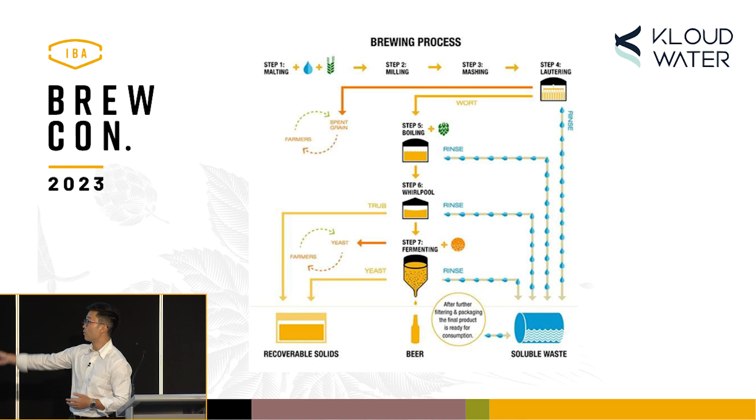What typically we think of as causing wastewater is the volume, and that volume is in your CIP, your rinsing, and also your washdowns. So that's where all your water is coming from, right? But actually, a lot of the concentration in your wastewater, which ends up driving up those numbers when we're looking at samples, comes out of what we typically consider the solid removal stage, because the fine tube at the end there, where you're trying to tap that away, if you tap that away, it's actually almost 100 times in some cases the concentration of the wastewater coming over here.

So that's what you want to be really careful of if you're not side streaming already. And if you're not side streaming, I would suggest that it's something you really want to consider, especially if you're a small craft brewery. As I was explaining before, if you do it earlier on, it's a system you can start to implement and have your team understand the value of, and thus when you scale, they know how to incorporate that as part of their process.

Now, when push comes to shove and the issue becomes a lot more intense, it can be even more of a challenge to ask your team, who's probably stretched thin already, to start incorporating processes to minimize the sort of liquid waste that's concentrated going down the drain. It's an easy and free thing that you can do, and it's probably one of the most effective things you can do when it comes to wastewater management.

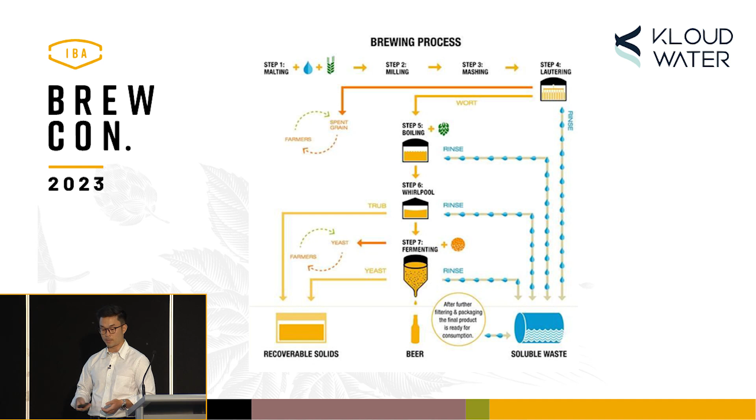So I've got a little video over here that shows wastewater being demonstrated. We've got canning here at Coastal Brewing Co. with David and Helen. If you have a canning machine, you're very familiar with this, but there's a bit of overflow that occurs during this process every time, and that's essentially pure beer going down the drain.

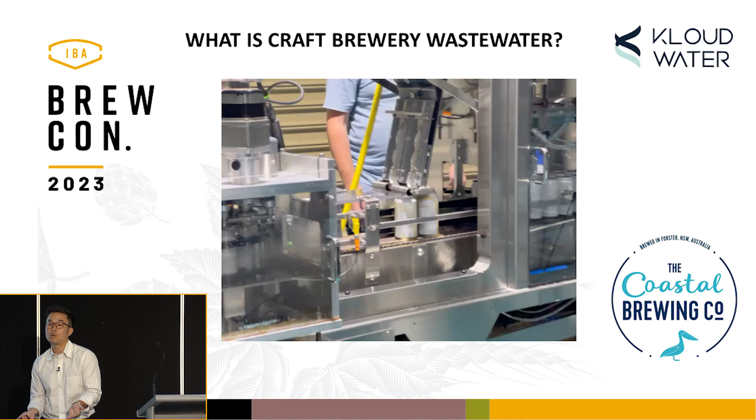Beer itself, obviously, is what we drink, it's liquid, it's liquid gold, so we don't think of it as very toxic in any shape or form. It's not compared to heavy metals, but one can just visualize what the effect could be if you were to take a gallon of beer and throw it down the river. It's quite intensive in terms of the effect.

And that's where your water eventually ends up going anyways, or it has to go through a centralized treatment system, which has to be sized well enough to treat that. So those are the mechanisms driving the concentration increases. A lot from that, but the sneaky one as well is trub.

So if we go a little deeper, these are the sample results that you typically might get, or this is what it might look like. I'm sure some of you are quite familiar with some of this chemical nomenclature. What's really important typically is flows, which if you don't have a flow meter, there are ways that you can forecast what that is, but typically you would have a flow meter.

In many cases, no, there is no flow meter, especially when a brewery is first conversing with me. But we can model that out. We can make estimations, say these are the ratios we can apply. This is the average, but if you want to be conservative you can choose this, and if you want to be optimistic you can choose that. These are the implications, and this is what you should be expecting. So we always inform, and it lets you have more options to choose how you want to approach the wastewater problem.

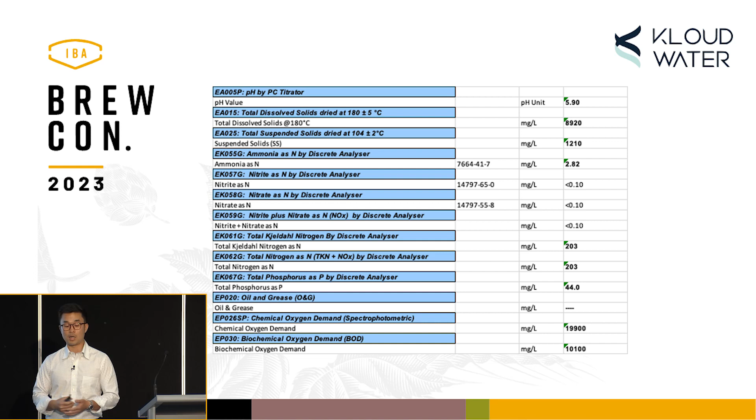And the last one is your organics in BOD, which is your sugars, and then nitrogen and phosphorus, which typically may come through your cleaning agents. But BOD is becoming more and more of an issue, especially right now—it's being felt by regional breweries. I hear quite a bit of rumbling in the metropolitan areas, depending on which metro areas in Australia you're looking at, but it will come, and it's always good to be aware of it and be informed, and make that decision quickly, readily, and informed when you come to that point.

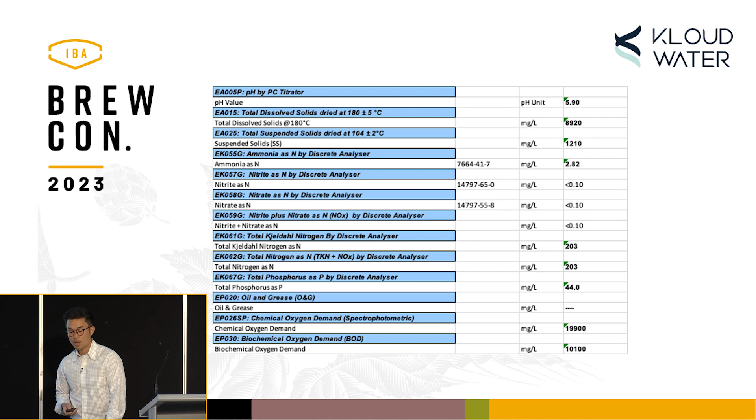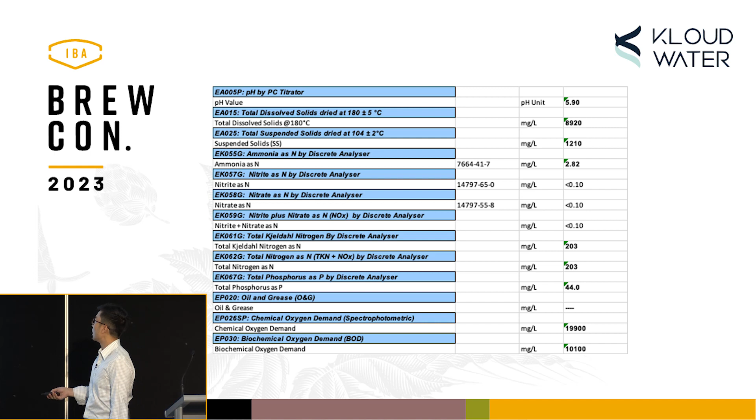I want to show how these numbers can differ quite a lot from this sample brewery to the next one I'll show you. I want to point out the BOD, which was 10,000 for this case, and also your pH, around 5.9. Flows we don't really have here. Even in the high scenario, this was actually modeled by a consultant to the brewery. It's always changing, every brewery has a different situation. They're much more optimistic because they had a consultant come in, and they were trying to ask the consultant to portray their wastewater in a particular light.

My advice in that situation is, that's fine. If you've looked at the numbers and you know your brewing process and think that's been demonstrated before, you can go for that, and we'll show you what our system, if you need treatment, will look like. But be informed that if your wastewater samples are a little higher than that, this is what you need as well. We'll always table those options for you, because we start the system design with modularity and scalability in mind. Those are the things you want to think about, even though you might want to demonstrate your wastewater coming in at a very low level.

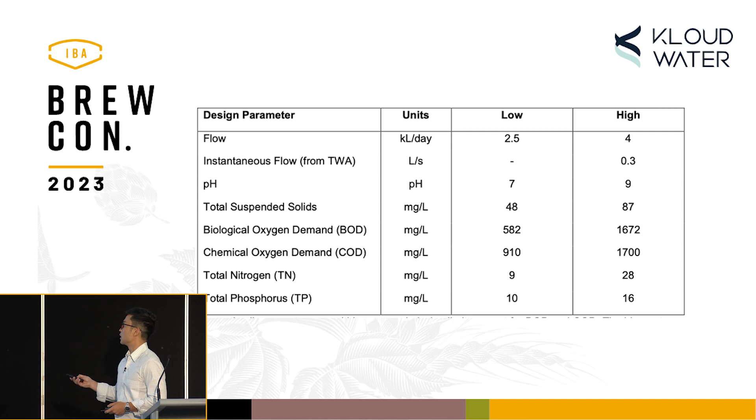Sometimes that might make a lot of sense, but in the long term, once you have the real world application and you're seeing results come back from a treatment system - say it goes in, you're thinking it's going in at 1600, it may not be. Then you're treating it and it's coming out at, say, 2000, and you're saying, what's going on here? We have to go back and do sampling if you haven't done that already.

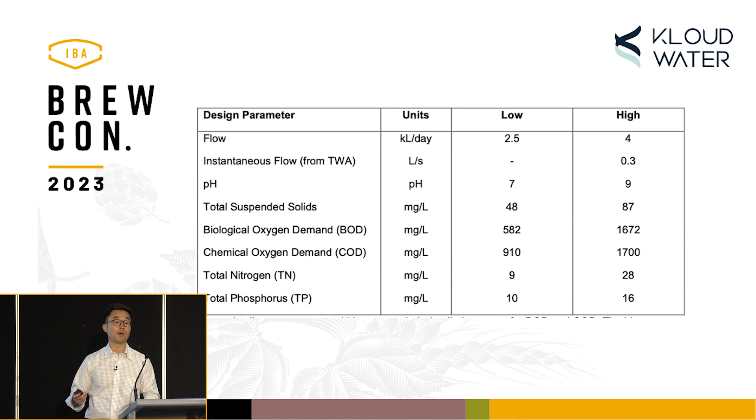So, the different ways we can explain this: do you want to choose 1600? Do you want to go for an industry average at 4000? Or do you want to do a sampling regime? That's probably what I'd advise - looking at your process, as a general template, sample Monday, Wednesday, and Friday, middle of the day, the easiest way. Combine it all, send it off to a lab. That's going to be much more accurate as an example of how I would address that, or how you could address that.

Okay, so priorities of a brewery - different forms of wastewater problems, that's what we're talking about now. Typically, the priorities of a brewery are as such - I just took this from some sort of strategy document. High quality beer production, product portfolio, winning new customers, et cetera. So this is what you guys are talking about, probably on a daily or regular basis. This is what it should be, right?

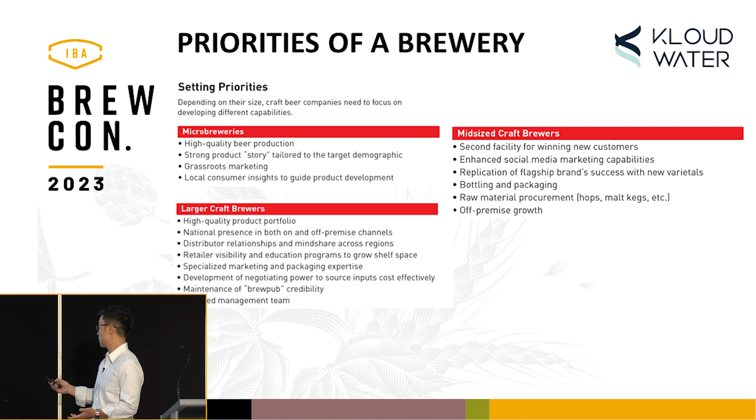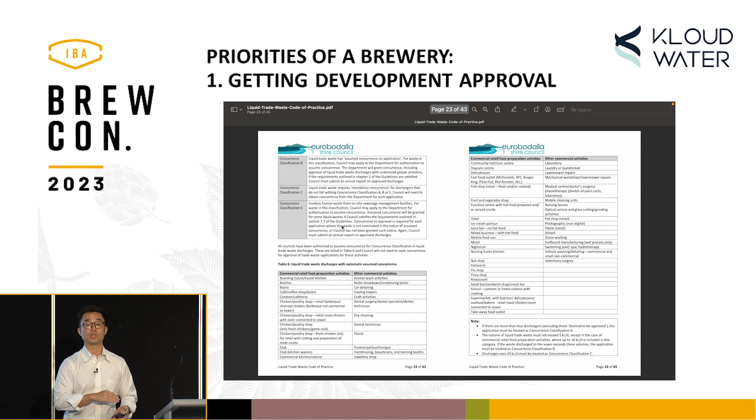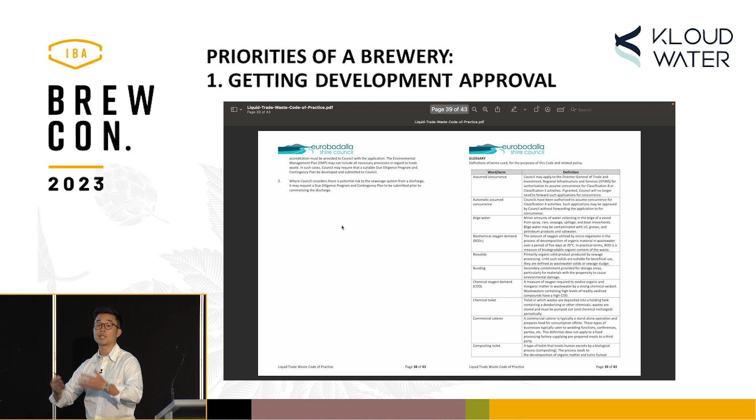But wastewater becomes your priority when it becomes a problem, right? And this is how it can be - there's a video that shows it scrolling through. You go all the way through the DA, through the process of securing the lease, you've bought the equipment, you're ready to put it in, and maybe your brewer's had experience brewing, maybe in Sydney, where all your wastewater just goes straight down the drain. You might think it's going to be the same process in your location, especially with a lot of destination breweries and brew pubs setting up in Australia. Then you find out that because the regional location is serviced by a smaller treatment plant, with a smaller demographic, you actually need to treat your wastewater and have a waste management plan.

As you saw that flick right through, this is going to be tabled onto you at the last second, and then you have to make sense of that, and form a plan to address your wastewater - which is not the most favorable thing to do right at the last second. Lease is secured, it's going to start soon, the equipment's already here. What do we have to do?

There's been, as I hear in the industry, many occasions where brewers are forced into a particular solution because it might seem like the right thing, or it might get them approval, but then they find out six months down the road that this thing's not going to last them for very long, or it's causing issues right now. A particular issue is getting a septic tank essentially placed into the concrete. I've heard it happen not too long ago, not too far from here, and now it has odor issues.

They had to rush the concrete cutting, and so the whole system, even though the tank is probably worth 15,000, ended up costing them $100,000 to actually execute on that project. And when you look at one of our modular systems, the very base level, it's a fraction of the cost. So it's a big... yeah, it's a little upsetting.

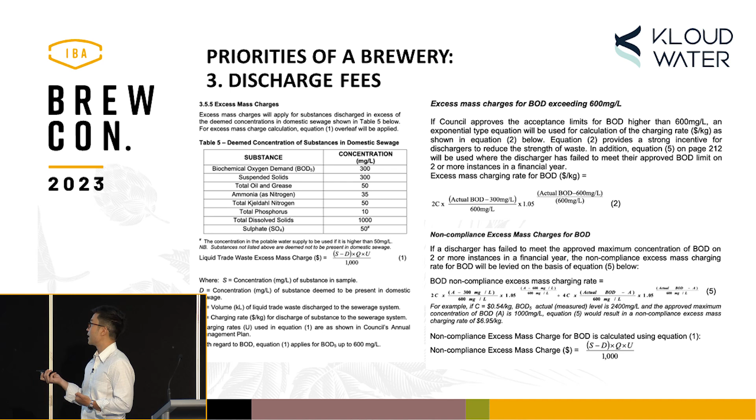But what you really want to know is that there's this equation - this is the most important equation out of all of it. I'm not going to try to explain what each piece means, but in its entirety, it's an exponential equation, meaning that if you discharge a couple of times and you're not meeting target, the fee exponentially increases, like so. They won't even call it an exponential equation, but it is - you can see, if you're into math, that's what it is. So that's what it means.

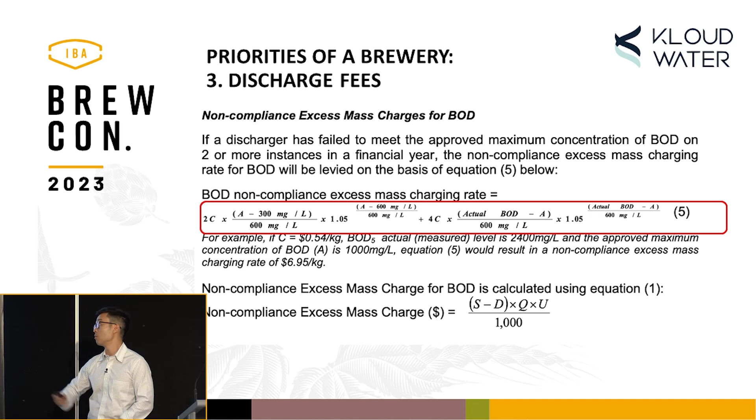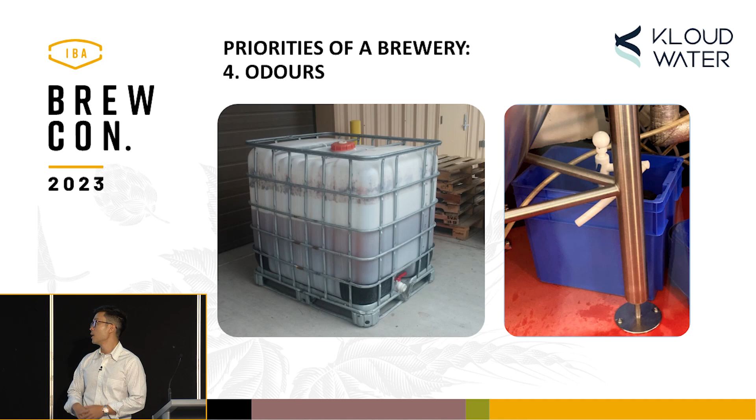And then lastly, odors is a pretty obvious one. If you have a primitive system that's just a tank in the ground, especially if there are blowers in it - a lot of the solutions proposed as an option for you are essentially a septic tank with blowers underneath. So you've got wastewater going septic because maybe you're not managing the flows well, so throughout the week you get a bulk of something like trub, for example. No one's told you not to put trub down the drain, and then you're blowing it, agitating all those fatty acids, which are very odorous. And if your brewery is anywhere close to your patrons, that's an issue in itself as well. So that one is very clearly obvious.

These guys typically do it - the consultancies, engineering firms, and specialists. They do wastewater treatment sites for big food and beverage facilities, the ones you see in your supermarket, plus sewage treatment plants, mines, and whatnot. Then there are the septic tank suppliers, who'll do it for off-the-grid homes. They'll look at your wastewater and say, hey, that's brewery wastewater, potentially that can go down our system. Yeah, it's happened before. So that's what the market was before.

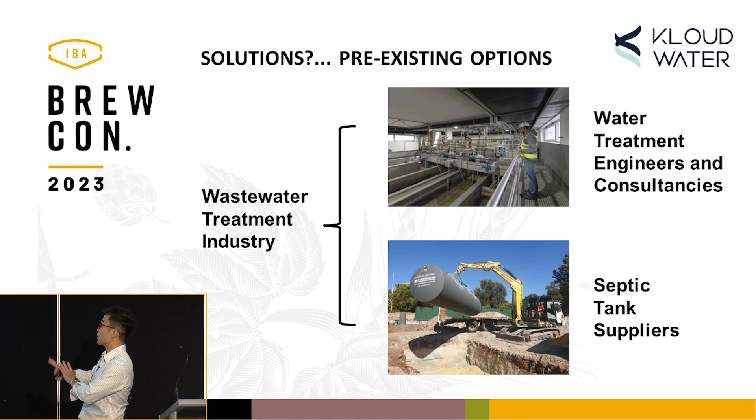So just a bit more context on how the actual structures of the business work. The size of the projects are much larger for these engineering companies, which requires a different design philosophy. If you're trying to design and detail a solution for a much larger facility and scale that down to the needs of a craft brewery, there's a lot of overheads and considerations suited for a larger facility that get incorporated into yours, because it's unlikely they'll adapt to your needs if they're running off a certain capital project.

Their supporting team as well - if you think about it, they've got typically fleets of servicing teams. Having that means they have to justify those costs. That's why up until now there hasn't really been a reliable and consistent option for small craft breweries and small craft food and beverage.

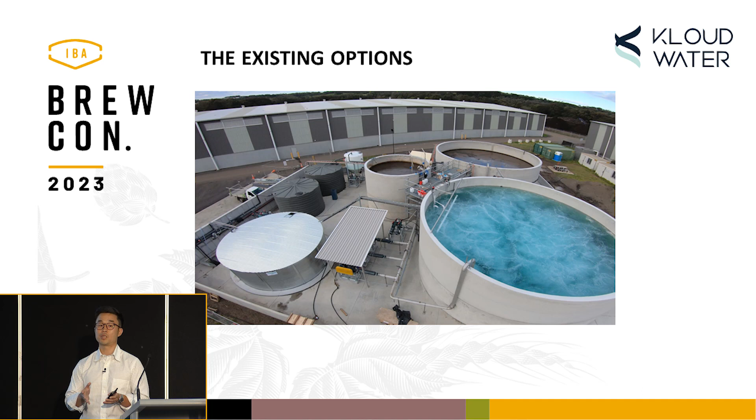Here's an example as well, they can go a little bit more in detail. So this is a packaged solution. It's actually quite nice, I have to say. It's a pH correction system.

The thing with this is you're essentially shipping this whole system, and depending where you are in the country, that's dead space - you've got a tank. If you're able to describe how this system works and give you the key components, what can be shipped is just a little parcel, and you can get the tank yourself. Because you've set up a brewery, most of the work in terms of plumbing it up is often very straightforward. So do you need that work done by an engineering consultancy? And these pH systems aren't typically done by septic tank suppliers.

So that's one way we can start to deliver options to the brewery. Over here are images of the sort of products that they produce on the other side of things - so they're either over-engineering the solution or under-engineering the solution.

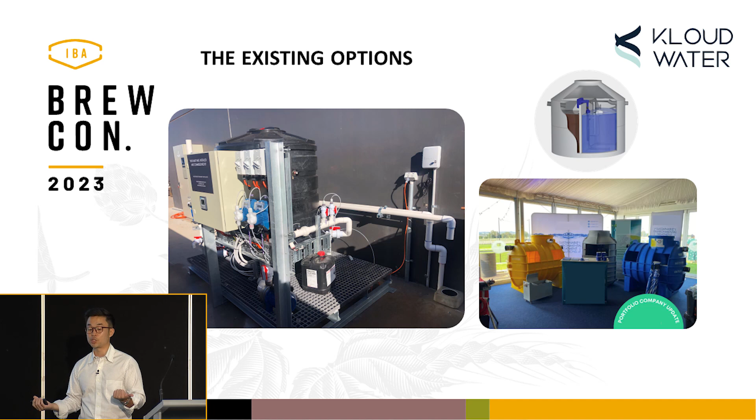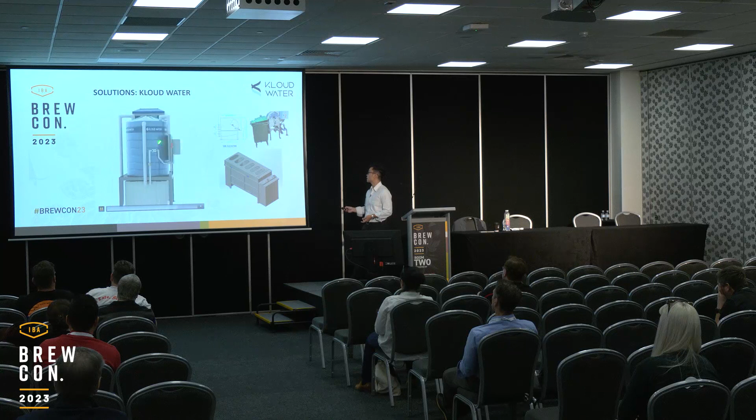So this is what we're doing now for craft breweries - we've scaled it completely down. The first module you'll see here will be your holding tank, which will do your pH adjustment as well, similar to that system over there. But we won't say, hey, you've got to purchase like this. We may just supply this component, give you the drawings, and walk you through it - whatever way you think is best for your destination, for your brewery, for your context.

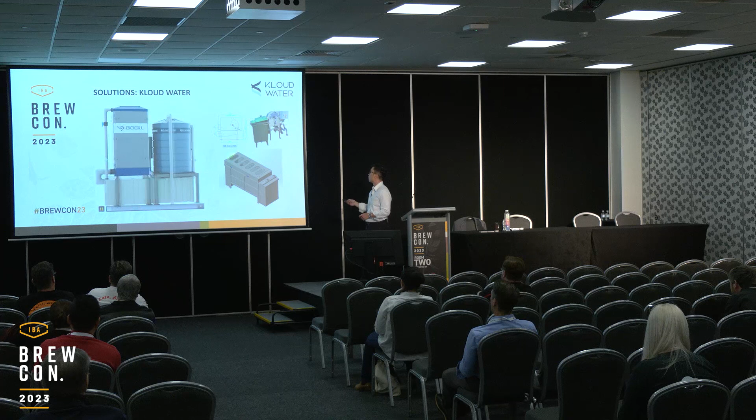You've also got the biological component as well for treatment, and now you have different components. In metropolitan cities, you may be able to get away with just solid separation - that's your screening, so we'll include that if required. We've also got other components for bigger breweries to remove your organics.

Okay, so some solutions - we've got a few case studies. I won't go into the technical details of how the systems particularly work, but more how we approach the problem. We can go into the details of how wastewater solutions are packaged together and how they work, but I think that takes a whole other presentation in itself - it will be more of a technical one.

So Rupert at Wandana in Mullumbimby installed a couple of our systems. When they were setting up their brewery, the council wasn't really aware of how to treat trade wastewater, craft brewery trade wastewater. Mullumbimby is connected to a much smaller municipal treatment system, so council was not familiar with our system.

So we held meetings with not only council, but also Rupert. Rupert got to understand how the system worked a bit more through that process before signing any papers, and we got to talk to council to have that open conversation with them - what do you need, what's most important in this document for you - and then give our own input as to what we thought made sense. After that, we put together a proposal that took in those inputs, and it was approved.

And so Rupert now operates the system. He operates it autonomously and has as much understanding of the system and its operation as he does his brewery.

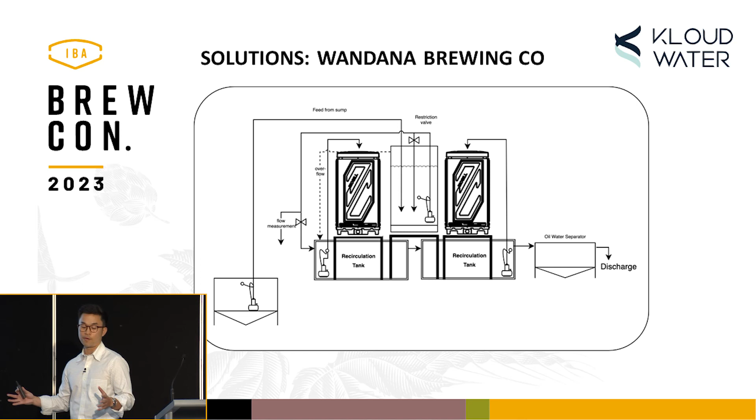This is a bit of a process flow diagram as how it looks. It can get more detailed than this — this is more very preliminary to a certain extent. But his system goes into an in-ground pit, gets pumped into a holding tank over here to fit the space that he wanted to allot to it.

And then the system obviously recirculates continuously. There's pH dosing that occurs in this tank as well. And then this overflows into this tank over here and goes onto the oil water separator. So he had an oil water separator on his site, and he said, is there any way that we can actually make use of this? Otherwise it'd be wasted equipment, really.

So we had a discussion with him whether it'd be good to have it before or after, and also educated him on how it would affect the system. And so now he's empowered to actually test to see whether or not he prefers to have it at the beginning of his process or the end of his process.

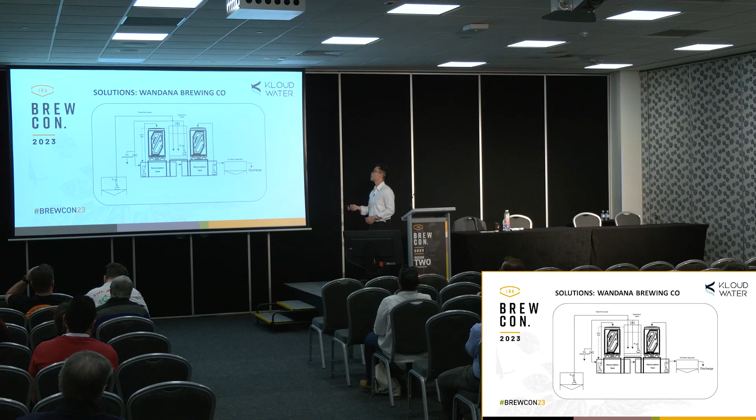So he's actually chosen to move it back up to the front because it helps him collect the solids at the front, because that's more useful for him as opposed to collecting potential solids at the end, because this system actually treats really well biologically and doesn't create a lot of solids, he's found. And so it's better to have it at the front. But we won't go too much into detail here on this one in terms of the technical design of this.

Another solution here, Lord Howe Island Brewery. They're obviously located in a very hard to reach destination — you need a barge to get over there. And this is a really good example as well. During my time at BioGill, we reached out to some of our engineering partners to get a solution to them to the standard that they're used to, but it really was just project prohibitive, right?

You can't have this brewery operating without an appropriate wastewater treatment system, because it's actually connected to a UNESCO World Heritage Site. So that wastewater doesn't have connection to trade waste. They needed to treat it down, otherwise they had to go kaput on the actual project itself.

So I worked with the environmental consultants that they had, because this is with Lion, to identify the key risk factors that they were concerned about. The key things they needed to address was a little bit different, because you had to get it out to such a protected application. So it actually was nitrogen, and obviously BOD as well, but nitrogen in particular. As we specialize in brew wastewater, this is a process Kloud Water can quickly navigate, and we can often include it as part of the solution service.

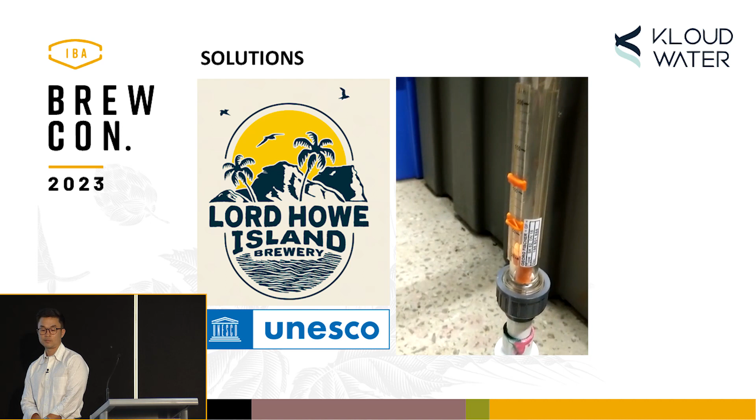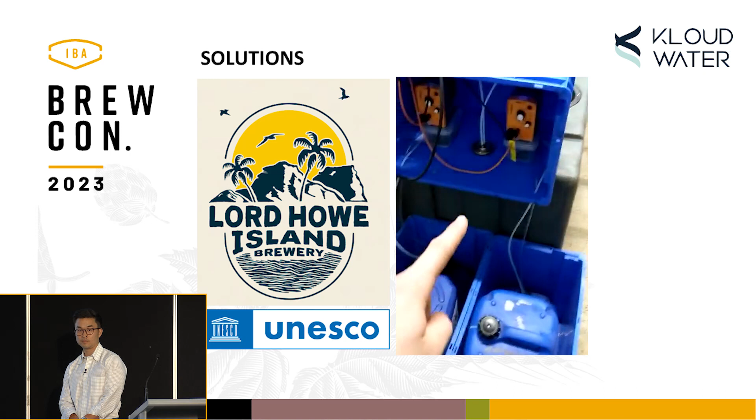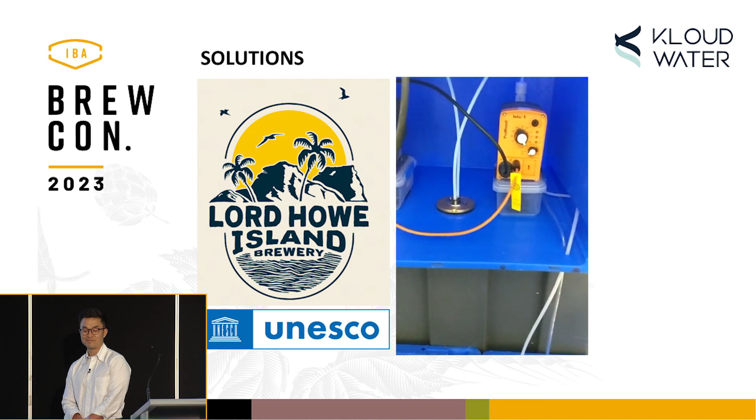From the brewery, water comes through this grey reinforced pipe, falls into our holding tank. The holding tank gets pumped out and recirced in a ratio to achieve a good flow level according to our reading on a flow meter. Then a pump inside the pit pumps past a pH meter and gets pumped over the BioGill spray balls. Inside this recirculation tank, the pH is measured and then controlled by these two pumps that are neatly mounted on Tupperwares, and that doses acid and base.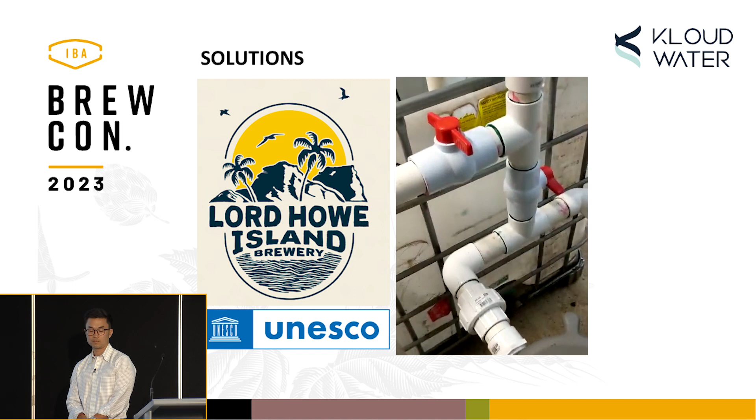As water moves into the first BioGill, it naturally overflows into the second BioGill. Same thing happens where it recirculates over the top, and as water gets pushed through the system, it overflows by gravity into a third tank, where it then either gets pumped through to filters and into an irrigation tank, which goes to the jungle. Or if the water's not yet of quality, we'll close that valve and rather send it back to the beginning of the system for another lap or a few through the system.

So two key things about this project made it a little bit difficult, and how we addressed that. Being out on Lord Howe Island, it's very difficult to get anyone out there to complete the works. So Alistair had to have confidence before the project proceeded that he could actually install the system. We delivered on that before any signing occurred.

As you can see, we didn't actually supply the pH dosing equipment there. He procured that himself, and we just specified what he needed. That helped him cut down costs, but obviously the installation there is a little bit rudimentary.

So this is what the system looks like as well. What's key here is that there's a dual return flow. That's really important, and that's what we actually applied to help him reach the targets he needed with certainty. Because it's so stringent on an island, and you're not discharging to a large centralized treatment plant, you're actually discharging it straight to land, essentially reusing it. You need to have a sure, safe way to treat it again, treat it down, and thus you have to treat it again. Now you can't always treat it again, otherwise it kind of doesn't make sense.

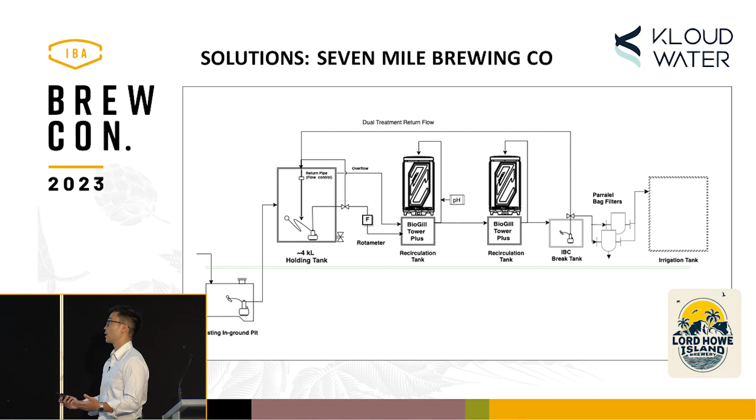So another solution, 7 Mile Brewing Co. It's Matt, and this is the system there as well.

It's a similar style system, but their initial issue originally was they had a failing, how do you describe it, like a baffled septic tank to a certain extent. That was advised by their another consultancy that said that would work. That caused a lot of odor. All the wastewater was going into this big tank with baffles in them. A lot of odor, and they were just not meeting their targets. Trade waste was really on them consistently, and they were paying fees as well for that.

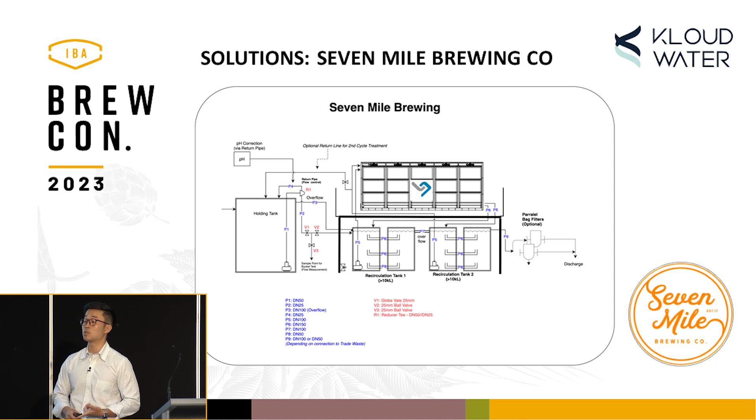What does the system actually look like over here? So this is the system that's in place right now.

Originally what we did was we came in and had a discussion with Matt as to what his flows were. We modeled those out. We also looked at the concentration of his wastewater, and we actually assessed his development and his trade waste policy. So we understood what needed to be achieved, and then we looked at what equipment they already had on site and said, hey Matt, you don't need to get a brand new pH system, you can actually install it yourself. You don't need a new holding tank, you've already got one over here that's unused, so you can use that yourself. And then we did the design of the pipe work as well for him.

And over here, the BioGill system could have used a recirculation tank with a pump skid. So instead of having a pump skid and the controls with a pump skid, which can be very expensive, we opted for automatic submersible pumps, which minimizes the costs involved with the pumping skid.

So again, no product is perfect, and there's a couple of things that occurred at the brewery. One is there was a bit of excessive foaming that occurred, which you can kind of expect through brewery wastewater. It's quite a large system. So originally what we did was we returned the outlet pipe from here back down into the tank. We extended it further down so that it actually goes beneath the water line, so as to lower the agitation. Although that helped, there was still quite a bit of foaming, and that's due to the brewing cycle that's occurring, a little bit heavy on certain days, certain times. But we worked with their team, and Dan, one of the brewers over there, installed a sprinkler system.

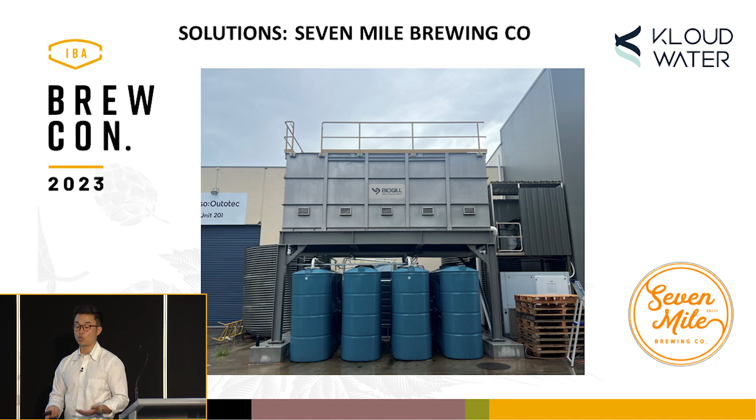And yeah, so that's it for my presentation, and we'll do a bit of a Q&A now, if there's any questions.

Question: do you only do BioGills, or do you do aeration vessels as well? Yeah, we can do aeration vessels as well.

What's the downside of an aeration vessel? You have to ensure certain conditions are met, so operation requirements are a little bit more stringent. And also, because a BioGill system is passively aerated, there's almost zero odor issues operating the unit itself. But if you have an aeration-based system, whether MBBR or activated sludge, there's a higher risk of odor occurring, especially when wastewater gets septic, maybe in a holding tank for example, and you're just agitating that up. And if you're closer to the patrons, as I said before, that can be a bit of an issue there, yeah.

I'm interested to know what sort of levels of BOD, TDS you're achieving. Yeah, so the targets for the ones that go to smaller treatment systems, trade waste essentially, the targets are 300 milligrams per litre. Inlet for that one was, I forget off the top of my head, but usually we set it at around 4,000, especially if it's a greenfield site. But we always talk with the brewery to see what the industry average says, and get a sample if we can. But I don't have the numbers at the top of my head for what the inlet was for 7 Mile, for example.